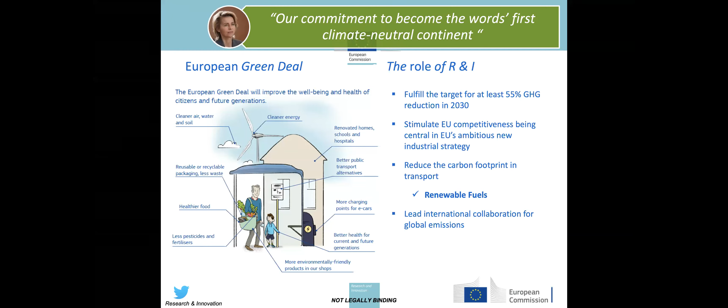What is the role of research and innovation? One of the problems of this initiative is how to fulfill the target of 55% cutting in greenhouse gas emissions by 2030 from 1990 levels. And this is to be done by stimulating competitiveness. So the research and innovation policy in renewable energies and renewable fuel sectors is exactly to reduce the carbon footprint in transport and in all other sectors, and also to lead international collaboration for cutting global emissions.

In a nutshell, the policies and strategies currently under the European Green Deal that affect this area are the following most important ones, because there is a bunch of policies, but these are the most important. A strategy for energy system integration was published last May, and it explicitly says this strategy will unlock the potential of sustainable biomass and biofuels, green hydrogen, and synthetic fuels. This is important, it is a political statement in an annex to the EU Green Deal strategy communication.

The second is the hydrogen strategy for a climate neutral Europe, and this is about creating an industrial chain, boosting demand in industry and mobility, and promoting research and innovation in clean hydrogen.

In addition, we have the biodiversity strategy for 2030, which is very linked to sustainable biomass and feedstock for many of the technologies for biofuels and bioenergy. It's about restoring forests, soils, and wetlands and creating green spaces in cities. Whatever is done in the development of technologies and products has to be compatible with this biodiversity strategy.

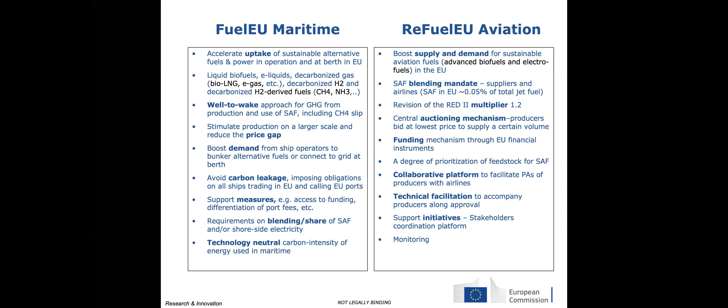So these are the highlights. Other legislation important under the 2030 climate target plan includes the EU emissions trading system revision, the carbon border adjustment mechanism, the effort sharing regulation, the renewable energy directive, where both the renewable energies and transport targets are going to be revised, the energy efficiency directive, the LULUCF, methane emissions in the energy sector, the energy tax directive, the alternative fuels infrastructure, the performance standards for CO2 emissions in light commercial vehicles and passenger cars, the buildings directive, energy performance of buildings directive, and the third energy package for gas, for the decarbonized gas market. So all these are important pieces that will shape the market of technologies like HTL.

Where will the money come from for all these actions of the Green Deal? Of course we have the multiannual financial framework that is adopted now. It is about 1 trillion plus the recovery package, and it will be a mix of money that comes directly from the EU budget and other funds triggered by the EU budget, like private and public investments. The heart of this is the Invest EU program.

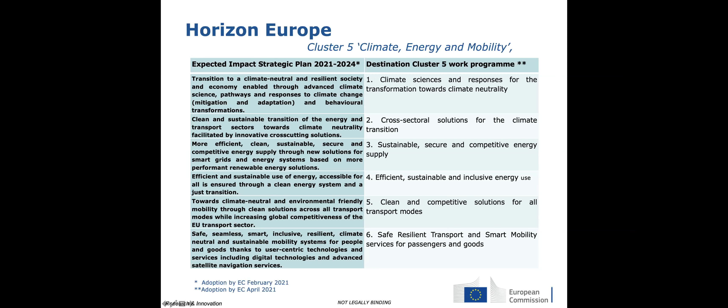The destinations are sustainable, secure, and competitive energy supply, and efficient, sustainable, and inclusive energy use. If we look closer at the destination of sustainable, secure, and competitive energy supply, to make this supply more efficient, clean, sustainable, and secure, we have the areas where we address these impacts: global leadership in renewable energy technologies, grids and energy systems and storage, and carbon capture, utilization, and storage - together complemented by cross-cutting issues and leveraging between public and private investments in clean energy systems.

Now, for bioenergy, biofuels, and renewable fuels under Cluster 5, as you see from the support of the legislation where sustainable biomass, biofuels, renewable fuels, synthetic fuels, and hydrogen are mentioned, there will be a growing market for advanced biofuels and renewable fuels. All those bioenergy, biofuels, and renewable fuels are essential for energy use, but also as energy carriers.

On the other hand, advanced biofuels are the most deployable solution for aviation and shipping, also heavy road transport. We saw in FuelEU Maritime and ReFuelEU Aviation that emphasis is given to these fuels. But the problem is still reaching competitiveness of the technologies, and this needs to be done through research and innovation for cost, performance in terms of emissions, sustainability, and efficiency.

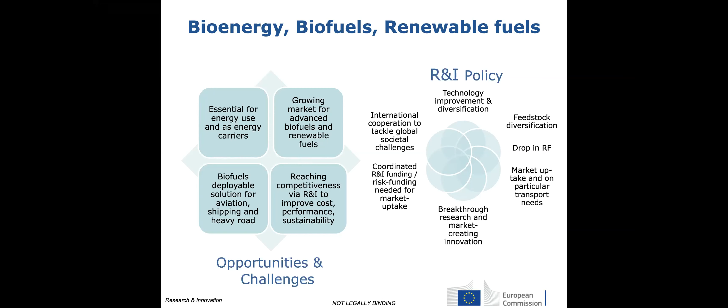So the research and innovation policy has these headlines: technology improvement and technology diversification - technology neutrality or technology support to pathways under the vast portfolio of technologies for these products; feedstock diversification to be compatible with a biodiversity strategy; drop-in renewable fuels for sectors that need them; market uptake measures, particularly for sectors with particular transport needs; long-term and breakthrough research and market-creating innovation; international cooperation; and for uptake of more market-ready solutions, coordination with other instruments and risk funding financing.

Overall, the picture for bioenergy, biofuels, and renewable fuels looks like this. We continue to support feedstocks like waste, residues, forest and agriculture residues, organic fraction of municipal and industrial waste, carbon content in flue gases, aquatic biomass, and renewable energy also for production - power, heat, sunlight, and CO2. As products, we see bioheat power, sustainable bio-CHP, bioliquids, biogas, biomethane, liquid biofuels, renewable fuels of non-biological origin, and sectors including road, marine, aviation - all sectors.

So in H2020, we had almost 400 million dedicated to topics in these areas: 48 topics, 20 RIAs, 11 IAs, 7 market uptake measures, and 10 strategic actions.

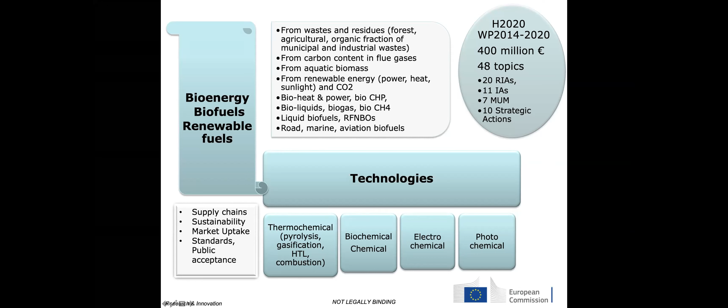The technologies covered over all the portfolio, from thermochemical, including pyrolysis, gasification, HTL, even combustion for CHP, to biochemical, chemical, fermentation, electrochemical, photochemical. And we addressed also supply chain, sustainability, market uptake, standards, and public acceptance.

And here for the hydrothermal liquefaction, we have 7 projects: the 4Refinery, the HyFlexFuel, the Heat to Fuel, the Waste to Road, the NextGenRoadFuels, the BL2F, and the F-CURED. These are all research and innovation actions, of course, due to the TRL of this technology.

And you can see that all of them are running. Some of them are going to finish this year, and others will go up to 2023, like the last ones from the LC-SC3 call of 2019.

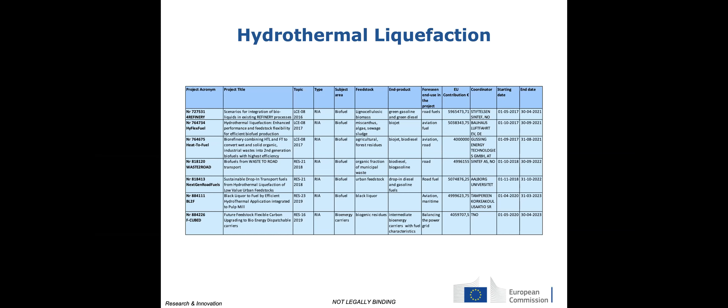So you can see that they target all areas: road transport, aviation, biojet, drop-in fuels, and intermediate bioenergy carriers with fuel characteristics.

Now, looking forward, we have been discussing with the research and innovation stakeholders and the industrial stakeholders in several workshops during Horizon 2020. The last was in EUBCE. What are the needs? And we came up with some general trends.

One is, of course, improving the technology in biofuels, bioenergy, and renewable fuels. This could be like supporting next generation technologies, algal fuels, novel catalysis, artificial photosynthesis, etc. Also, in the technologies, we include technologies that are at TRL 3 to 5.

The other thing is to couple the renewable electricity or the renewable hydrogen production and the CCS in any combination with bioenergy conversion systems, with biofuel and renewable fuel production. So one could think to support efficient production with negative carbon emissions, for example, or renewable energy carriers from renewable electricity surplus and CO2 emissions, or other things similar.

A third area is to have bioenergy solutions and circular economy in a value chain approach, for example, integrating production in existing industrial plants, or addressing complete value chains, or gasifying biogenic residues and waste in a sustainable and circular way, etc.

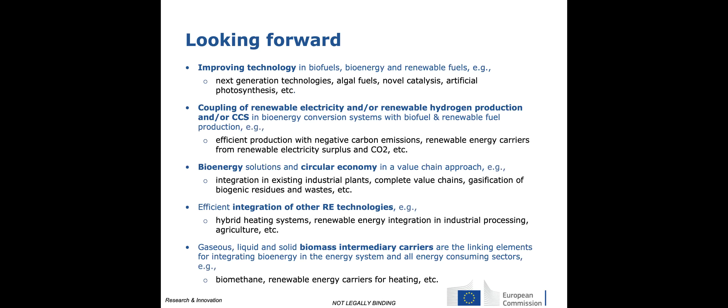And of course, it remains very pertinent always to support the gaseous, liquid, and solid biomass intermediary carriers and renewable energy carriers, because these are linking elements for integrating bioenergy in the energy system and in all energy consuming sectors. For example, biomethane, all the renewable energy carriers for heating, etc.

And lastly, a few words on how to leverage public-private investments to support work also in renewable energies and renewable fuels. So we have put forward the Clean Energy Transition Co-Fund Partnership.

They published their Strategic Research Innovation Agenda in November 2020. The whole scope is to support clean, affordable energy production and conversion technologies, to have a climate neutral, flexible and robust energy system, to look at storage and integration in the energy system of the storage, to look at circular flows, resource efficiency, energy efficiency in the energy sector, and from the social point of view, to take into account the inclusive energy transition, the sector integration coupling, and the digital transformation.

The idea is to pool national and regional resources and funding programs together with the EU co-fund that will enable the transition of the built environment, the transport, the industry, and other sectors to clean, low-carbon energy, and that will be implemented through annual joint calls for proposals resulting in grants to third parties with EU co-funding.

I think that is all I had to tell you. Thank you very much for your attention, and I would be happy to answer any questions you may have.

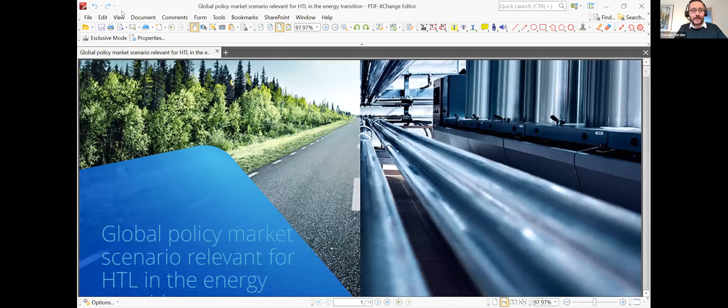Will you? Of course, I'm sharing my screen. Let me know if it works. Yes, view, perfect, full screen. And yes, I'm on with the video.

Good morning, good afternoon, everybody. I hope you are all well. Thanks to the organizers for putting up a really good program, I think. And I'll try to be short. Preben, you have to stop me eventually. I have too many slides, as usual.

So I was asked to prepare some slides about the global policy market scenario. And then I tried to expand to actually what are the global drivers we see for all the thermochemical technology, especially hydrothermal liquefaction.

So yes, I start with a conclusion, because maybe some of you will leave after hearing me for a few minutes.

The first point is basically legislation, and Maria gave a really good overview of what's happening in the EU. I have one slide about what's happening in the UK with development fuels, and it's basically here where we see some legislative incentives towards thermochemical technology, so from waste to fuels.

I have one slide about North America, US and Canada. There are commercial projects going on in Canada and the US, but as far as I can see, the framework is not fully in place for hydrothermal liquefaction. If you have any input about that, please write in the Q&A later when we come to these slides, I'd love to hear feedback from you. So that's the legislation part.

Then there's the petrochemical industry. You might be aware of this thing called chemical recycling, which is using plastic waste - you have mechanical recycling and also chemical recycling. Here you have technologies like pyrolysis and hydrothermal liquefaction that will allow plastic to be used again to make plastic. So it's really this circular economy drive. We believe, and we see a lot of activities in this - a lot on pyrolysis, but there are still only a few projects on hydrothermal liquefaction of plastic waste. So we think that could also be a very good opportunity for hydrothermal liquefaction.

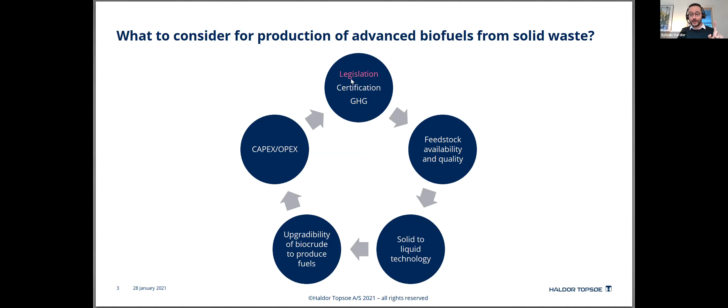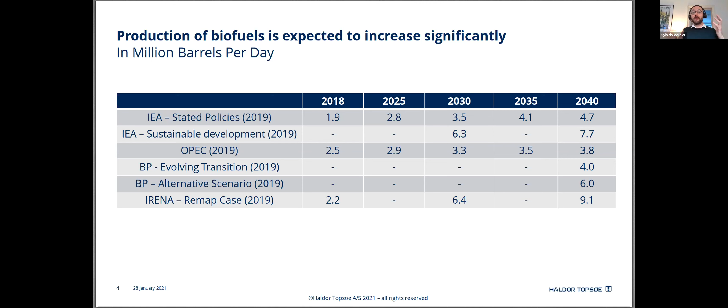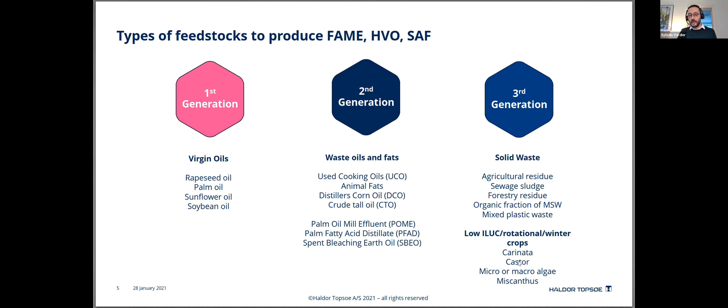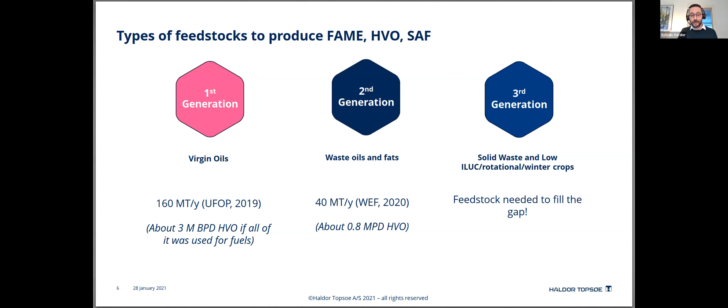So I tried to list some of them: forestry residue, algae, grape marc, manure, municipal solid waste, and so forth. Maybe there will be a recast of the RED II directive next year or this year, and maybe this will be increased. I don't know, I've heard different things, but let's see.

And then there's also this recycled carbon, so plastic waste and tires. Mostly the trends we see are to make new plastic, but there's also some people who want to make fuels out of it. Here it's not part of the renewable category, but it's recycled carbon fuels. The RED II allows it to be covered, but then each member state might decide to include it or not. So that could also be a driving force for hydrothermal liquefaction.

The UK with the RTFO program, also what they call development fuels, it's quite similar to the Annex 9 part. I won't go into detail, but basically the UK is also covering, I think, hydrothermal liquefaction, and then they might also consider recycled carbons.

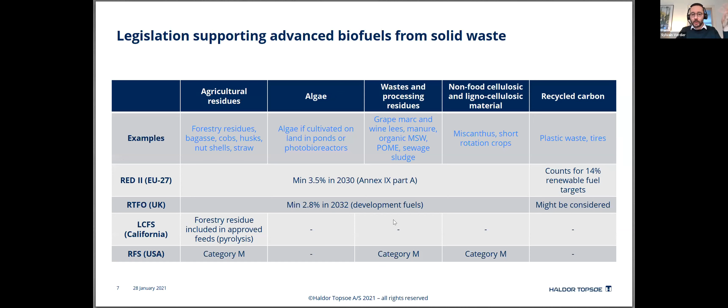So what does category M say? Basically, it's to produce renewable fuels from all this type of solid waste, and here there's a long list of technology. I didn't see specifically hydrothermal liquefaction, but the last category might cover it. So if you have any input about that, feel free to write in the Q&A section. That's really what I had about the global legislation framework.

Let's talk about chemical recycling. In the EU, it's really big. Thanks to legislation, 50% of plastic packaging waste has to be recycled by 2025. And since January this year, there's an 800 euro per ton tax on non-recycled plastic packaging waste.

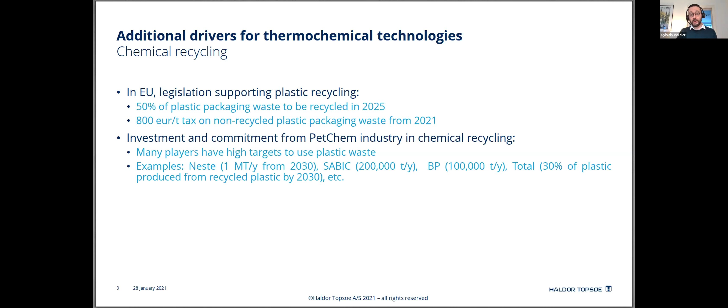The petchem industry is also really investing a lot of money in chemical recycling. Many players have really high targets to use plastic waste - here I listed Neste, Sabic, BP, Total, and many more have really high targets. And here, hydrothermal liquefaction again could have a part to play, I believe, we believe.

Aviation fuels, Maria mentioned it. If you look at the sustainability mobility plan presented in December, there's a nice graph going until 2050. If I understood correctly, in 2050, if you take all the jet fuel, one third will be fossil in Europe, one third will be e-jet fuel, and the other third would be advanced biofuels. This could be a chance for all the thermochemical technologies, including hydrothermal liquefaction.

Will it be feedstock or technology specific? It's hard to know. The pathway for using HTL is not approved yet, but I checked yesterday on the CAAFI website, and they do say that a significant number of prospects are being pursued, and CAAFI is aware of them. So I think there's already discussion with OEMs and so forth to have this pathway approved, which will be the game changer.

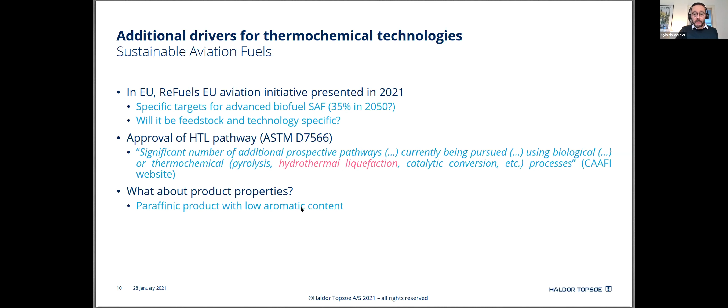Quality renewable marine fuels - I didn't see any draft about this initiative, and it will be launched in Q1 '21. But if you look again at the EU smart and sustainable mobility plan, you see numbers for inland and international maritime fuel. This is a 2050 prediction with different scenarios, and you have liquid biofuels - maybe a third, I expected. Here again, pyrolysis and hydrothermal liquefaction have a big part to play, we believe.

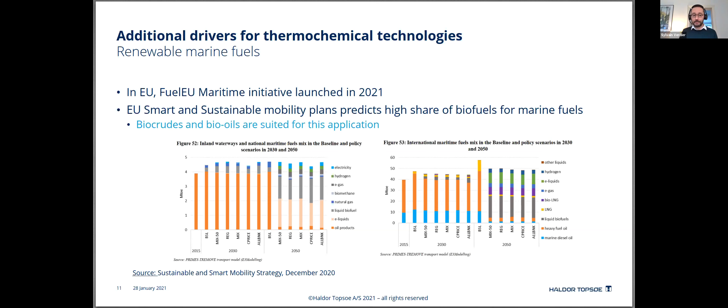Funding - Maria mentioned all the money available, more than hundreds of billions of euros. Looking at Canada, at federal level they have an investment fund, and two thirds will be for low carbon fuels. British Columbia also has credits under what's called the Part 3 agreement for low carbon fuels, so you can get credits if you have this low carbon fuel. In the UK, I saw recently some SAF competition schemes being implemented, and I don't know if any HTL processes are being pursued, but that could be relevant.

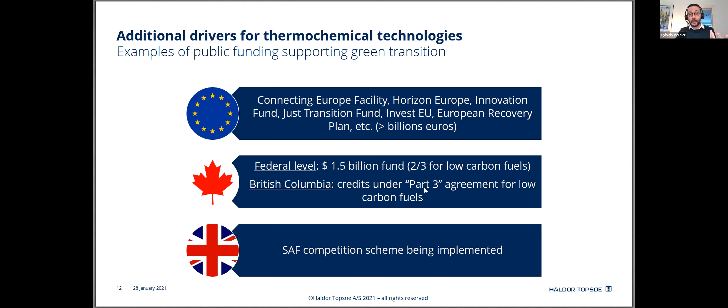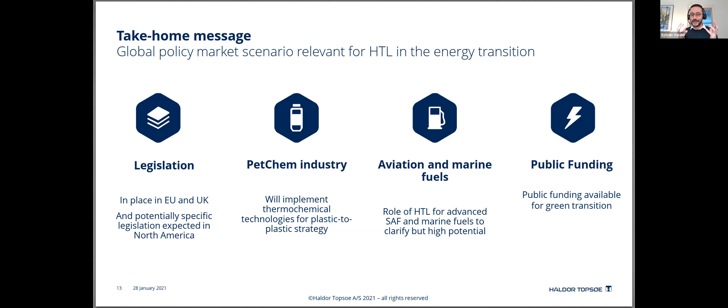So there's also funding available. Back to the conclusion - I'm running out of time. Legislation, the framework is in place in EU and UK. Hopefully in North America it will happen, especially with the new administration, and Canada, I guess, will follow - it often starts in British Columbia and then spreads. The petchem industry will have a strong influence, might be a game changer also for hydrothermal liquefaction. Let's see what happens. Aviation and marine fuels are big. We know that for light duty, electrification will possibly slowly take over. So for aviation and marine fuels, biofuels will have a big part to play, and public funding is available.

So that's all I had for today. If you have any questions, feel free to ask now in the Q&A, but I'm also happy to answer any questions later. Thank you very much.

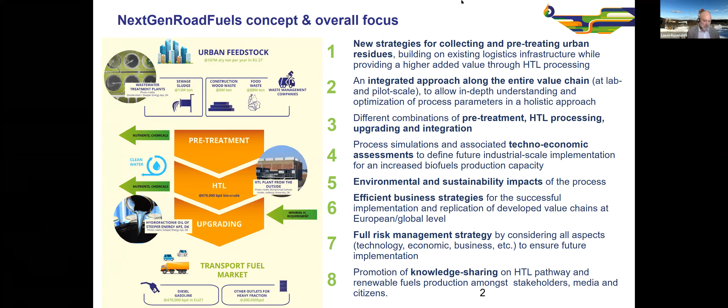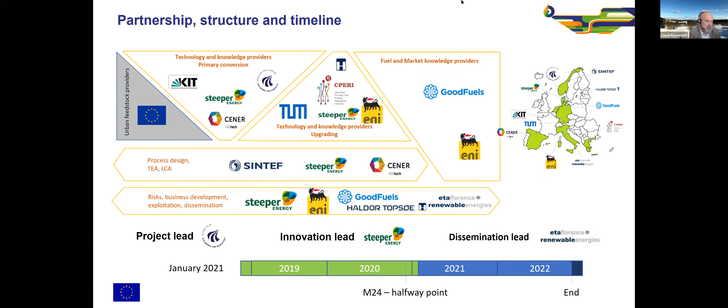So what did we achieve? One of our major deliverables halfway through this project was to produce 100 kilos of upgradable, high quality biocrude from urban waste. In the process of reaching that milestone, we've mostly worked with sewage sludge, processing quite substantial amounts, and also the organic fraction of municipal solid waste.

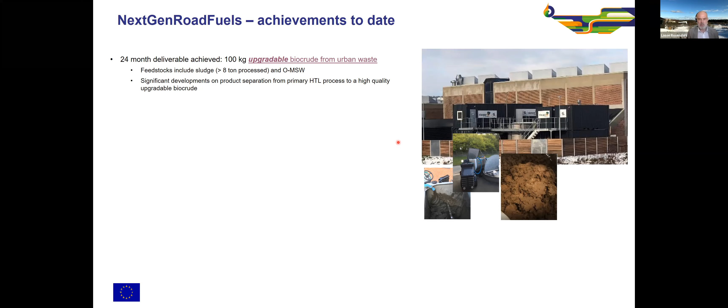Let me just turn on the laser pointer. You can see here the sludge slurry that we prepare, and this is the food waste slurry we prepare. To get to the high quality biocrude, one of the challenges we faced is whole product separation, to reach a quality where we have a relatively pure biocrude - not excessive amounts of inorganics, water, or solids. Part of this has really been focusing on building that intermediate processing stage to get the quality of oil you see in the image to the right.

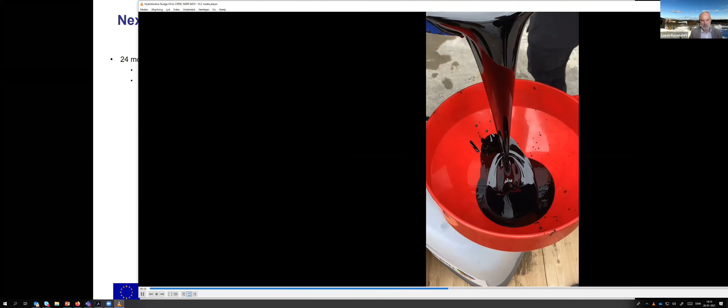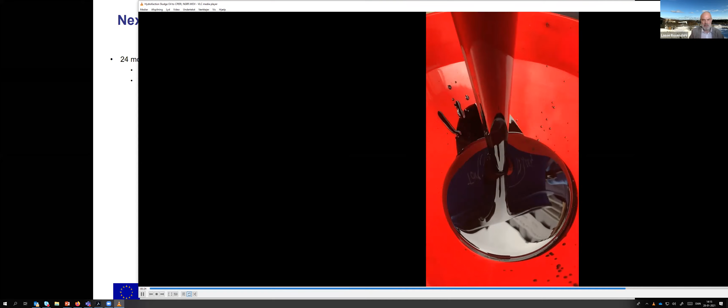I'd like to share with you - and this gets a little exciting, whether it'll work - a small video showing this oil, giving a good idea of what we are now taking to the next stage in terms of quality for the upgrading. So this is oil from sludge, and this is the sample that was distributed to the next stage of the project. Let me return to the presentation.

As I said, we've also been looking at other value vectors. In this case, it's been very much on proteins - protein extraction from sludge. This has been quite extensively covered, and we have pathways and technologies that allow us to do this with reasonable yields. But what we are tackling right now is that this is relatively high cost, so this is one of the things we're working on in parallel to the HTL pathway itself.

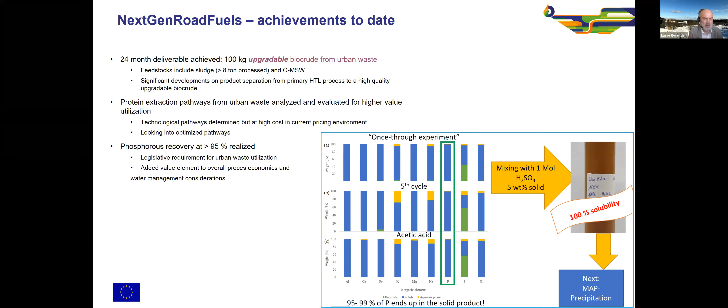Nutrients are another added value vector. Phosphorus is much debated, and in all these technologies it's one of the things we need to demonstrate we can actually handle. So what we've been looking at is how to extract phosphorus from our processing. As you can see from that bar chart, these are different ways of running HTL experiments. The middle one, entitled fifth cycle, is what we'd call a steady state run, and you can see the blue bar indicates almost all the phosphorus is actually recovered in the solid product, from which we can make it into a fertilizer for agriculture.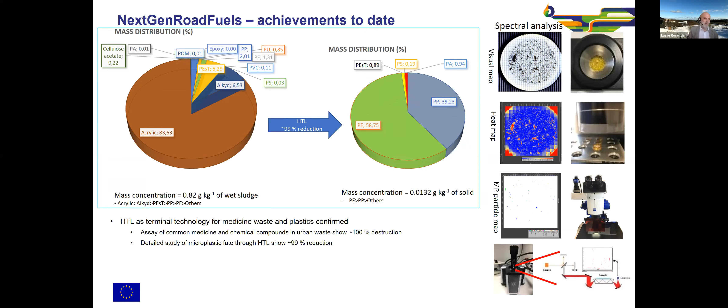The same kind of study has been conducted on medicine commonly found in sludge, and again the results come out with almost 100% destruction.

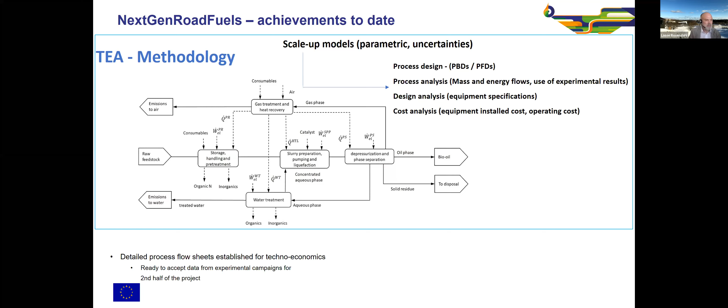Lastly, we've spent significant effort building up a techno-economics methodology based on process design and process flow sheets, to handle all these unit operations that we are putting into systems, and to allow us to feed in our experimental data in the second half of the project to actually start creating credible scalability, implementation, cost assessment, and process design work.

This is something we are at a point where we have prepared this for the actual analyses. So at the tipping point now, looking towards the second half, we now are at a stage where we have very nice biocrude, and the second part of the project will very much focus on turning that into fuels, either diesel.

Gasoline is also there as one of the smaller areas, but diesel and marine blend stocks and drop-ins is what we're targeting. And one of the issues, of course, is a hydrotreating setup, multi-stage, catalytic bed design.

In order to guide us into this part of the project, we use fairly advanced analysis technologies such as FTICR MS systems that allow us to understand better the heteroatom functionality in the oil, and understanding, as it's sewage sludge.

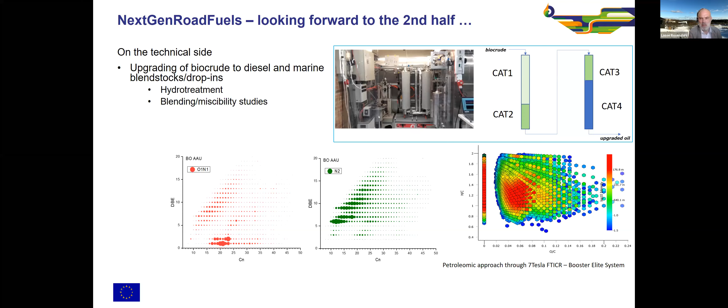Nitrogen, as you can see in the middle here, is a key issue, but also the oxygen functionalities in terms of how we design the thermal ramping in the hydro treatment. Those are all really important for us in order to maximize yields and time on stream in the upgrading.

Electrocatalysis, again, something which is turning out to be a bit of a hot topic these days, is within our scope, and so we're looking at electrocatalysis as well as part of the full upgrading procedures and incorporating that into our process design.

Once we've actually run a biocrude through this, we will be looking at the fuel properties and also demonstrating these in relevant technologies. And at the same time, we will of course be optimizing, going back to the HTL and looking at all the learning that we've got from actually doing production runs and turning that into optimization.

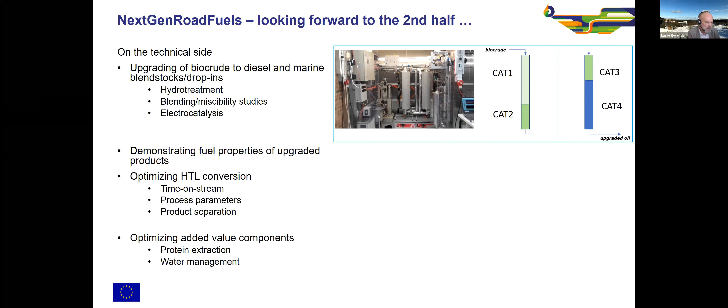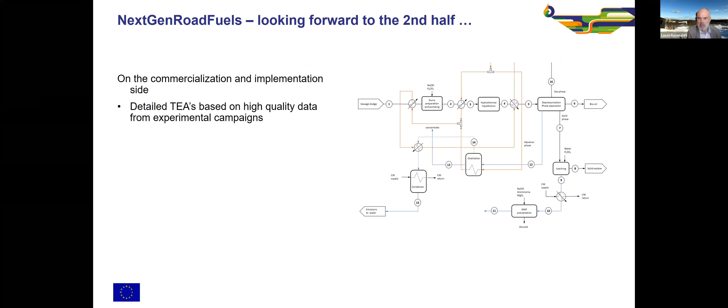We'll continue also to look at the added value streams, again, trying to increase the valorization of the proteins. And also, of course, now we start on implementation and commercialization activities, and this is where we bring our modeling process framework into use.

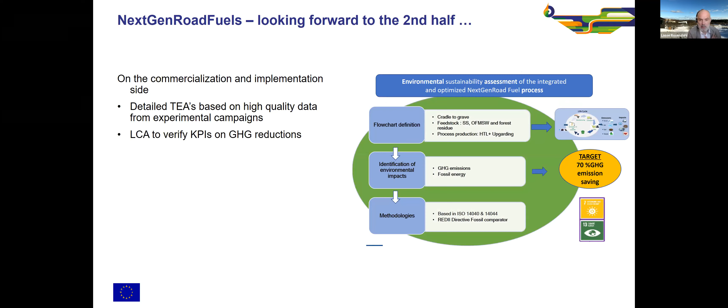We work of course also with LCA, as this now becomes important to document that it is actually living up to our own KPIs as well as those by the European Commission. And then we start looking at geographically specific markets, so in terms of feedstocks and products, as well as geographically and scale specific implementation, so to actually have business cases that can take us to the next stage.

So this is really what we'll be doing for the next two years in the project, and I hope that you'll all stay tuned, because I'm sure that we will be bringing out lots of very interesting results. So on that, I'd like to end and thank you all for your attention.

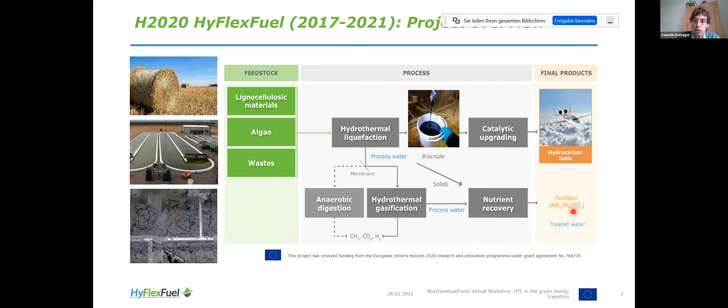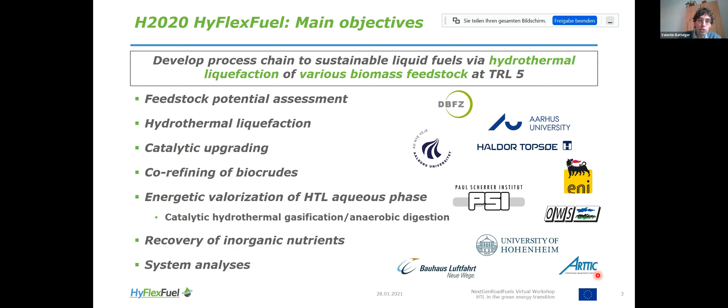So I quickly step now into the individual work packages and show some basic and important results from the individual partners. In terms of feedstock analysis, we did a potential analysis, both in terms of the total aggregated waste and residue potentials in Europe, but also specifically, DBFZ has created these kind of heat maps that you see over there, where you can choose a specific location and have a specific supply network based on the road network, and an analysis of what kind of different feedstocks are then available within a 50-kilometer driving distance from an individual plant location all over Europe.

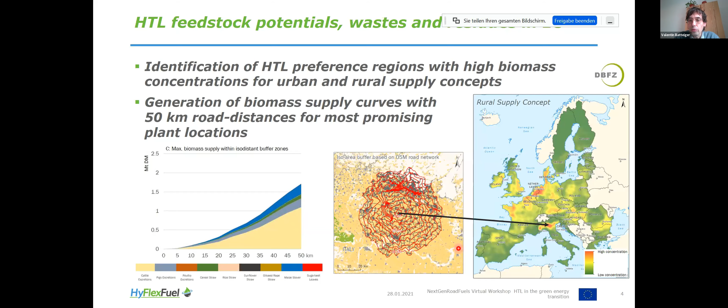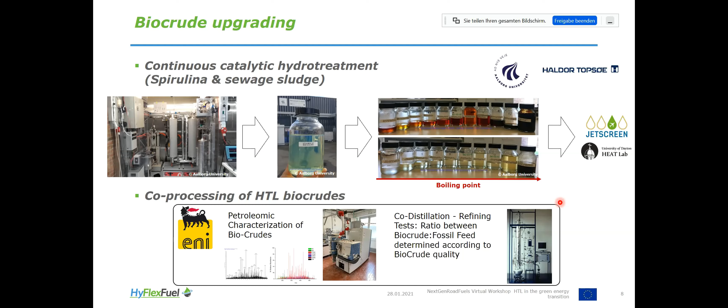Another important thing is the co-processing option that ENI is investigating in this project. There are also very interesting results here, but I don't have time to address this now.

For instance, the sewage sludge HTL fuel has a high share of cycloalkanes. This is good, because these kinds of molecules have nice cold flow properties, and if you look at the details of aviation fuel, they can be complementary to the more alkane-type renewable fuels, and can adjust the density of the jet fuel. So it might be a very interesting blend component to produce aviation fuels that are 100% renewable in the future.

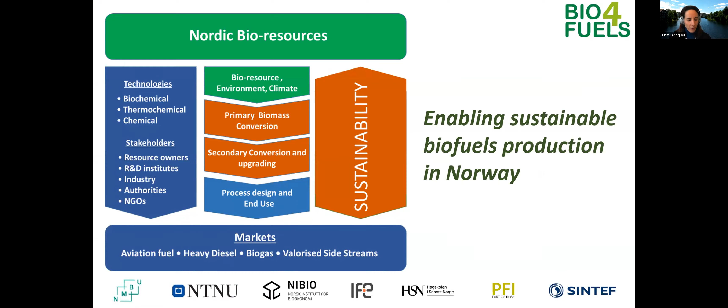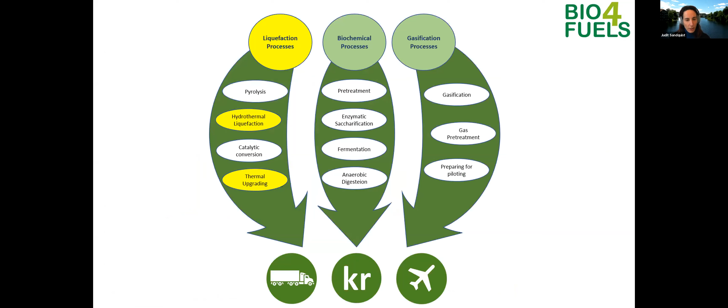This is a national center, which is quite big, and the aim is to support the Norwegian and international industry with their quest to develop innovative and sustainable viable biomass conversion technologies. Our target feedstock is lignocellulosic biomass and organic residues. This is quite a broad center.

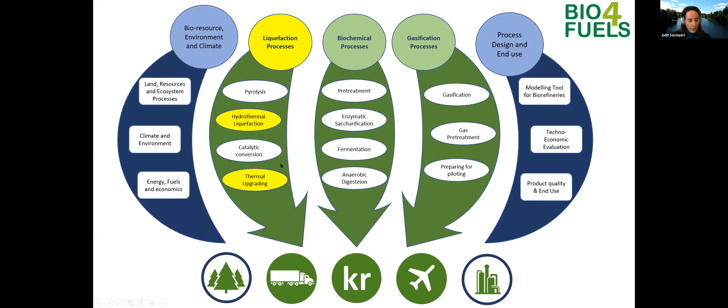It's not only liquefaction. We have organized the research activities in 3 value chains, and we have 2 supporting sub-projects. For the research activities, I'm going to focus on hydrothermal liquefaction and upgrading. In this center, we work together with other projects, but we also have our own research activities.

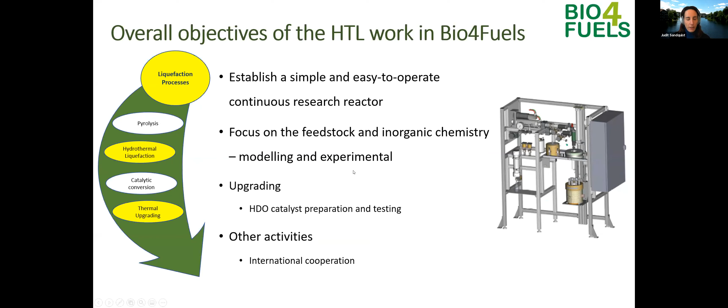For the HTL, our aim is to establish a simple and easy to operate continuous research reactor, where we focus on the feedstock, mainly Norwegian relevant feedstock, and inorganic chemistry. So we do both modeling and experimental work. For the upgrading activities, we are doing HDO catalyst preparation and testing. And of course, we have a lot of international cooperation as well.

For the modeling part, the research activities have been running for 3 years in this center. We have been mainly working on the modeling part, where we took an existing model for modeling the phase distribution of inorganic elements in the HTL reaction. This is a constrained model, but in order to compare to experimental data, we need to model the cooling and the compression.

For that, we have been using a commercial model, which is an OLI Studio Stream Analyzer. I need to admit this is not a simple quest. The models are quite difficult to use, especially together. We found out that it's very, very difficult to validate towards literature published data, because usually you cannot find all the relevant data needed for this work in any article.

There's very few available. So what we are doing now is our own experiments where we produce all the data. Of course, we intend to continue this modeling work, and we are looking for other researchers as well who want to join forces, because if it was an easy task, we would have some models available right now, but there are none. So please stay in contact.

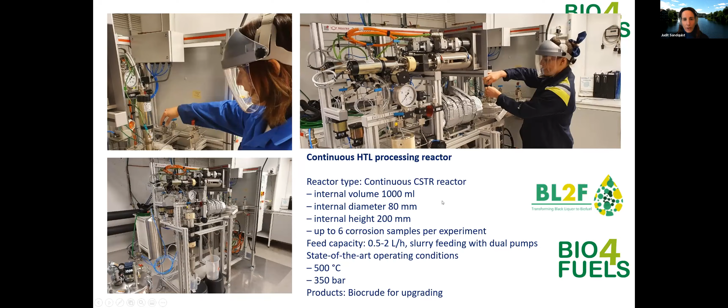So we have achieved 1 milestone at least, and we have been performing a successful experiment on wood powder. We were very lucky to receive an exchange PhD student from Aalborg University, who did the first experimental campaign. We have been using 3 feedstocks: wood powder, lignin, and microalgae.

Of course, it wasn't easy, and due to the fact that the student was here for a limited time, we chose to do batch experiments on the lignin and microalgae. We're still doing the analysis, not everything finished, and we have planned the publication. Here you can see the results of the first runs, where we compare subcritical and supercritical conditions, and here you can see where we compare the continuous and the batch mode of the same reactor.

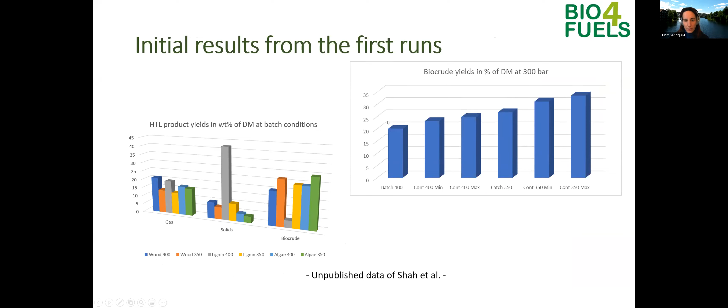When it comes to the upgrading activities, we are doing it together with a Norwegian-Indian collaborative project, where we do the catalyst development and the catalyst testing as well. So it's 2 tasks in 1 project. Here you can see that even without the catalyst, you have a significant HDO activity. But if you increase the temperature and add catalyst, you decrease the oxygen content.

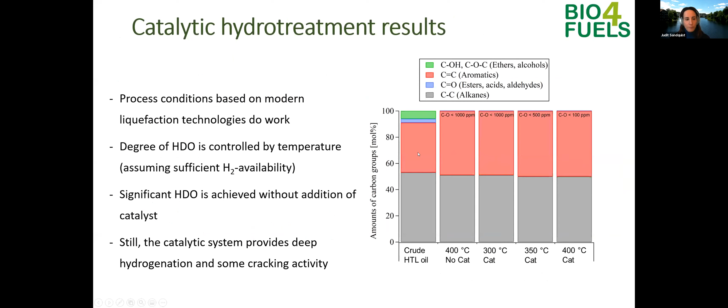It's working fine. Finally, I would like to show you our stakeholders. We have bioresources, the Norwegian technology providers, international partners, and end users and government and states. So it's a national team in biofuels research and activities for Norway.

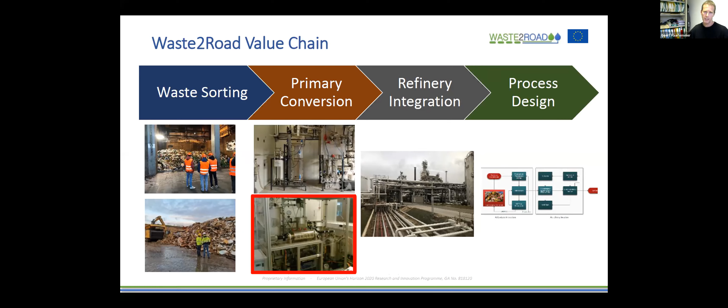Now we use two different reactors in this project. First is a fairly standard batch reactor, 600 milliliter reactor. The second one is a continuous plant, which is a 2 liter per hour unit, so quite small, much like Sintef's. It's a stirred tubular reactor, and here's a schematic of it.

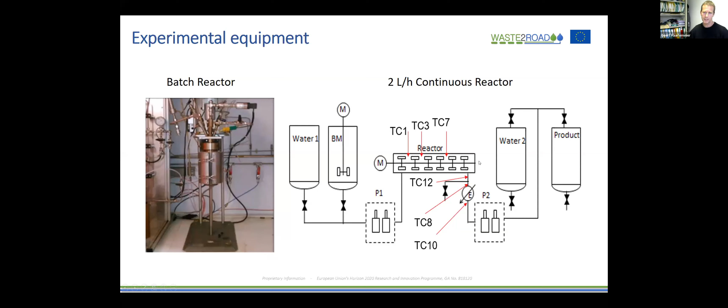Some results of batch experiments. We have an extremely wide variety of biocrude yields in the experiments. The best results we obtain typically with food waste, but even digestate produces a fairly large amount of biocrude. And what we find is that black liquor actually produces a very low yield generally.

So if we look at the quality of these biocrudes, by solvent extraction, we can determine how much char there is and how much bio-oil. We find that food wastes produce relatively good results, with quite a lot of bio-oil, while black liquor has almost no bio-oil. This is of course dependent on the solvent we use. We use ethyl acetate, but even dichloromethane gives similar results.

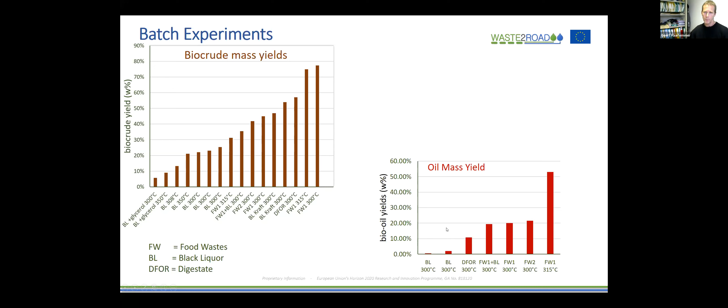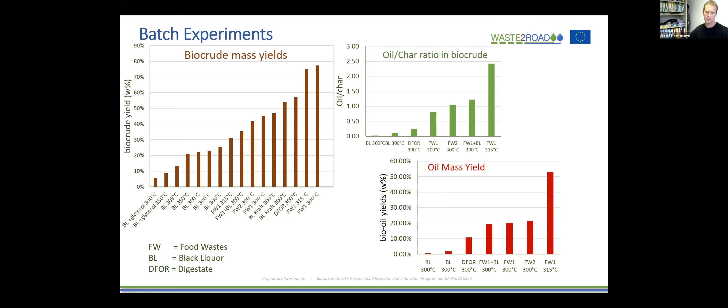If we look at the ratio between oil and char in batch experiments, we see that for black liquor we obtain a dry black powder, which we call a biocrude, but it's of course not really a crude. For food waste we get sticky materials, or even free-flowing liquids. It really depends on the resource and on the conditions.

So we also do continuous experiments. Typically we do these at 300 degrees centigrade, with a residence time of about 15 minutes in the reactor, corresponding to 1.5 liters per hour. So it's a small production. With these experiments, we typically obtain free-flowing liquids that are extremely viscous.

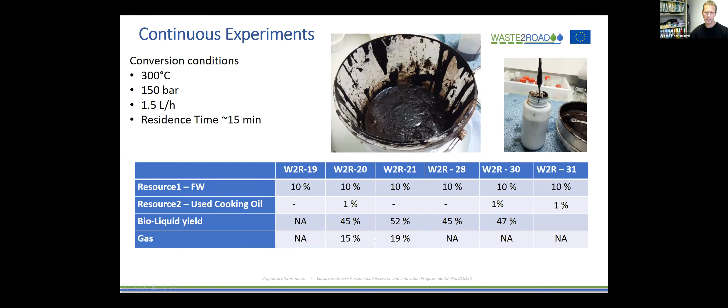But when slightly heated, they're actually quite nice liquids. When cold, of course, they're frozen solid. Typical yields are about 50%, so it's actually lower than what we find in batch experiments. And we produce quite a lot of gas, typically 15 to 20%.

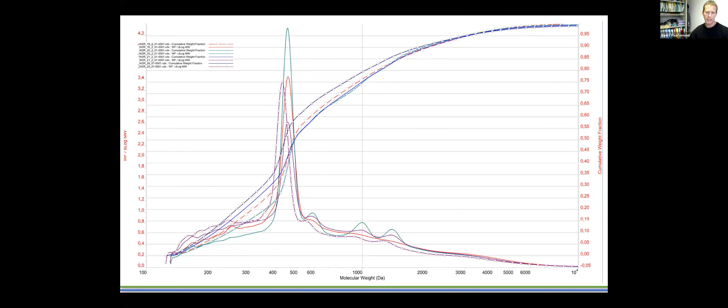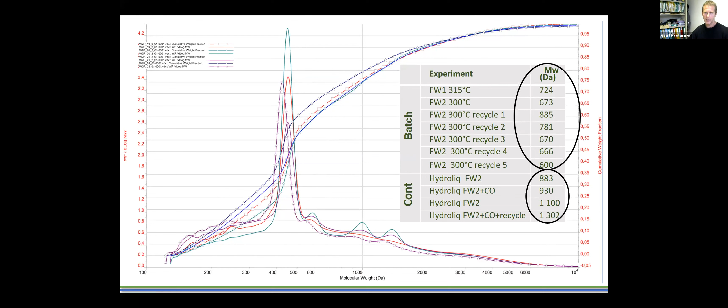When we look at the different oils in gel permeation chromatography, we can determine the average molecular weight of the different samples. What we see is that typically oil produced in batch experiments has much lower molecular weight than we find in continuous experiments. This surprised us in the beginning, but when we look closer at the difference between continuous and batch experiments, we find that...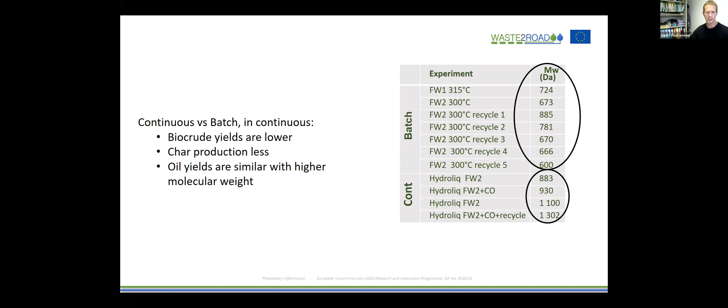So to conclude, we've done a lot of screening on different resources, particularly in batch experiments, using digestate, food waste, and black liquor. Food wastes are the best resource. This is due to the fact that it contains a lot of lipids, it's not very rich in ash, which is a problem with digestate that contains too much ash, and it also contains a lot of proteins and sugars, simple products, and not so much lignin, which helps at lower temperatures. Black liquor is actually quite complex.

On its own, black liquor doesn't produce very good results. But when we mix it with food waste, it does give reasonably good results, and there appears to be a synergistic effect between black liquor and food waste, where the sum is not just a linear combination. I think there's something happening there. Glycerol, however, doesn't really help in the liquefaction.

So far, we produced about 10 kilograms of biocrude, which will be made available for upgrading. And very soon we'll be testing other resources such as vinasse and the fermentable fraction of municipal organic waste. These are ready, but they're next on the cards to be treated.

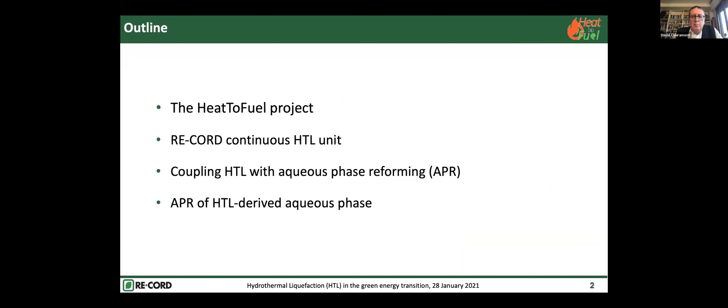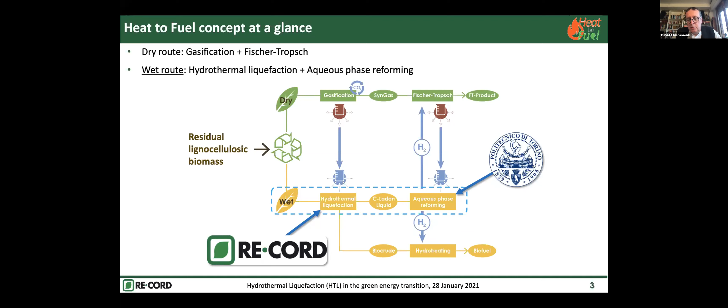I will try to keep it short. The project itself addresses two routes, a dry and a wet one. The dry route goes through gasification and Fischer-Tropsch to Fischer-Tropsch products, while we focus on the wet part, which is hydrothermal liquefaction and integration of aqueous phase reforming and the water-soluble organics in the water phase of the HTL process. So we integrate an internal way to generate hydrogen, as well as to treat this water, for upgrading the biocrude or using this hydrogen in the biofuel upgrading routes.

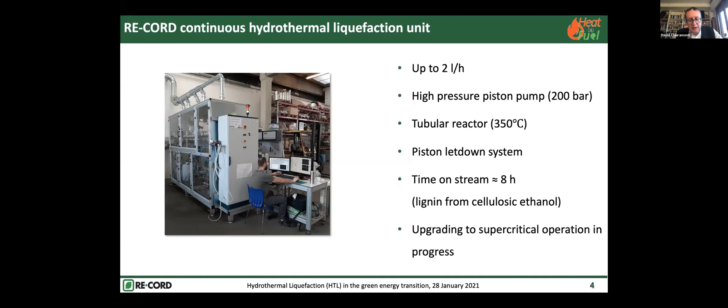The idea, together with the Polytechnic of Turin, of integrating these two processes is quite attractive to us, because once we separate the biocrude and have the aqueous phase, we can treat this aqueous phase with liquid-liquid extraction, and then send it to the aqueous phase reforming process, which is a catalytic process operating at approximately 270 degrees, 60 bar, with a commercial catalyst used to generate hydrogen that is then sent back to the hydrotreatment. That is quite original, but is also strictly linked to the type of feedstock fed to the hydrothermal liquefaction. I'll come back to this in a moment.

So the liquid-liquid extraction of the aqueous phase, the phenolics, is used before APR to increase the biocrude yield and improve H2 production. The water phase is then recycled after APR. Our results show that the hydrogen can partially fulfill the hydrotreatment needs of the biocrude, some 35%. As I said, this is very much also dependent on the type of feedstock. Of course, working with organic feedstock like organic wastes rather than lignin is quite different. Contamination can also be very different, and the catalyst is indeed sensitive to that.

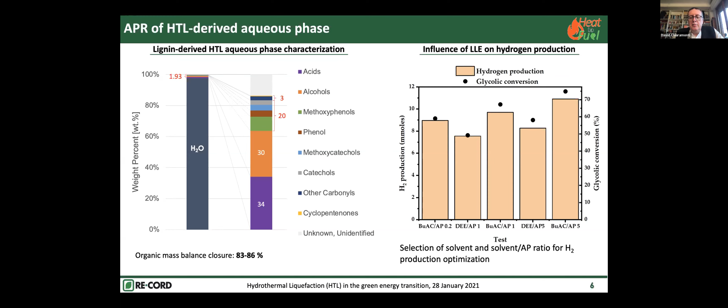The treatment of the aqueous phase from the APR process, from the HTL process, with butyl acetate has proven to be more effective in delivering better hydrogen yield with respect to the DEE. So there is starting to be some evidence on that. We are ongoing with this project, and now, as planned in the project, we will launch an open request for proposals to collaborate with us, with funding from the project, for hydrotreating the HTL oil samples from this lignin-rich stream.

It's not actually a residue because the lignin-rich stream is a quite significant amount in a lignocellulose bioethanol complex. It's probably or certainly a bigger amount than the ethanol itself.

And this step will aim at carrying out hydrotreatment experiments and catalyst testing.

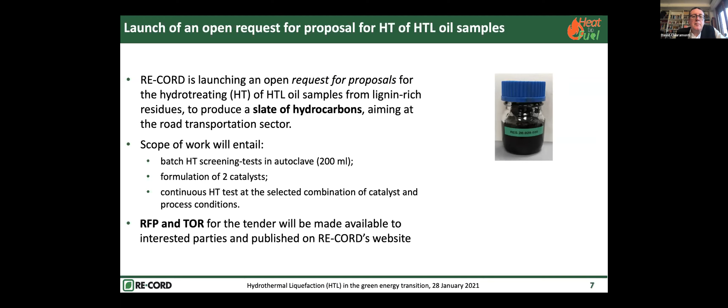So the terms of reference will be made available on the RE-CORD website very, very soon, and interested parties are welcome to react and send us this feedback. Given the short time, we'll stop it here, but of course we are available to respond to questions or any interesting element that is submitted through the chat.

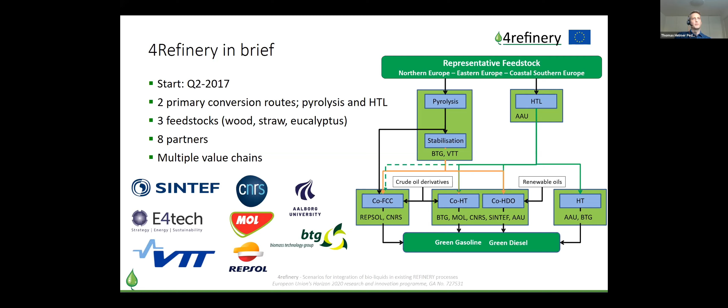I must say that even though I'm presenting it, the project is actually coordinated by SINTEF. But because I'm involved in the HTL activities, that is the reason.

So a high-level overview of the activities in the 4Refinery project. We do HTL biocrude production in our pilot units at the university. You could see it from Lasse's presentation.

Then we're taking different approaches to this biocrude. We have investigated standalone hydrotreatment of the bulk oil. We have looked into different co-processing strategies. One is to do biocrude distillation prior to upgrading. Another one is to do partial upgrading of the biocrude, mixing it with rapeseed oil. And then we have also been looking into hydrocracking of the bulk biocrude.

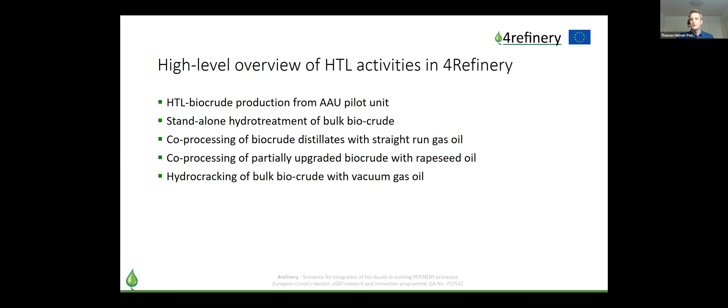And I will briefly touch on some of the opportunities and challenges that we have faced during the project.

So first of all, without going too much into details with HTL, I would like just to point your attention to the carbon balance. So in an optimum HTL setting, we can recover about 70% of the carbon in the biocrude. The remaining carbon mostly goes to the gas phase, with CO2 being the primary product. And the biocrude in this setting is also nearly upgradable.

It has a low water content. It has low inorganics content. And even though we call it a crude oil, you would think that's what happens then if you distill. But due to the residual oxygen content, which is about 10%, the crude oil is still not very volatile.

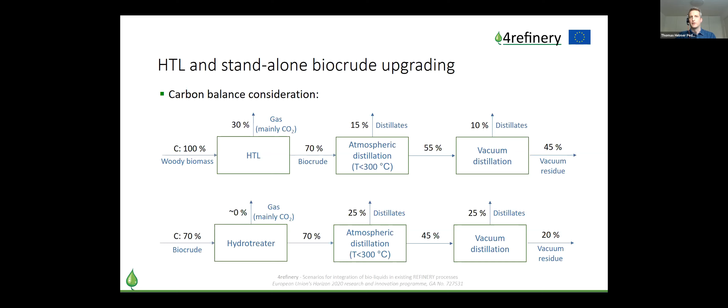And that would make the biocrude much more volatile, and that is resembled at the bottom of this slide here. So what you can see is that you can move a lot of the carbon from the residue to the distillate fraction. And by doing so, you can have about 50% of the total carbon from the biomass actually in the distillate fraction. Of course, this is an opportunity, but also this is the most expensive way, at least in terms of hydrogen consumption.

The other alternative to do bulk processing is to do co-processing. But the first thing you will face here is a blend wall. We looked into how HTL biocrudes blend with different other renewables, such as rapeseed oil, but also standard refinery streams like gas oils and bunker fuels. What we see is that they don't blend very well, or actually they don't blend at all. And we actually also see that some HTL biocrudes, they even don't blend.

So in order to ease the integration of these bioliquids to a refinery, we can do several things. We approach the distillation. You can see from the pictures here that when we start doing distillation, the lighter fractions, the distillates, become actually blendable with straight run gas oil.

And from distillation, we found that about 25% of the bulk biocrude can actually be blended with gas oil. Of course, that is the opportunity. The drawback is that you're still facing 75% of the bulk biocrude that needs to be treated otherwise. But nevertheless, what we investigated is what happens with these 25% if you blend them in gas oil.

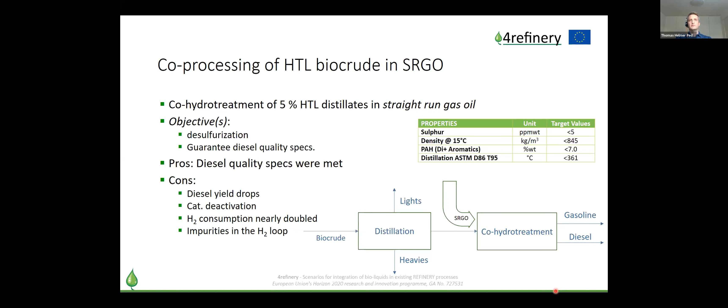But definitely, distillation could be a way to integrate these liquids to a refinery. Another way is to do partial upgrading. We did a study to see how low you actually have to take the biocrude in oxygen content for this to be blendable. We found that somewhere between 7 and 2% is the sweet spot, where this partially upgraded biocrude will become blendable with gas oils and with rapeseed oil.

So we also tested this in a continuous hydrotreater. Here the objective was not desulfurization, but deoxygenation. Our conclusion is that deoxygenation is actually feasible, and we can remove most of the oxygen from this blend. Again, this was a 5% blend, but you can see from the pictures here that there might be other challenges such as phase separation and emulsification of the products. But anyway, they can be treated simultaneously. It's the same catalyst.

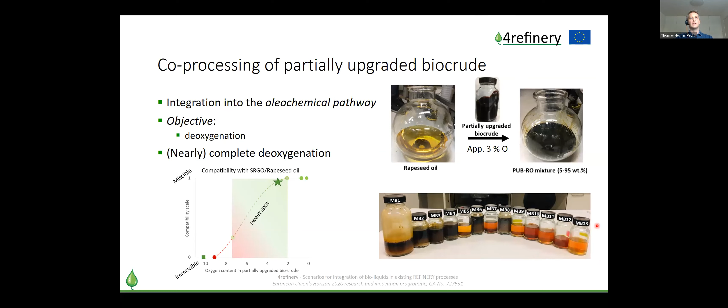Technical barriers, of course, they are there, but there are definitely also opportunities in going for the partial upgrading pathway. Before I go to my conclusion, I would say that I don't think there is a silver bullet in integrating HTL biocrudes into a refinery. I would say in the end, the business case determines where it goes, but also the setting - is this going to be implemented into a grassroots refinery? Is it a revamp, or is it a reuse of, let's say, old units in a refinery?

But I am happy to take questions on this as well. Thank you very much. Thank you, Thomas.

There's not much time for questions, but fortunately, most of the questions have already been answered. There's still one for you in the Q&A tab, which is also for HTL producers concerning integration into refineries. Most refinery processes require very low levels of catalyst poisons, as the processes have been designed to be online for many years. How low, or high, is the typical level of contaminants?

Well, I would say for this particular oil, which is from lignocellulosics, the amount of inorganics is a few hundred ppm. So you would typically think about a guard catalyst to take these inorganics, but it's impossible to remove them completely.